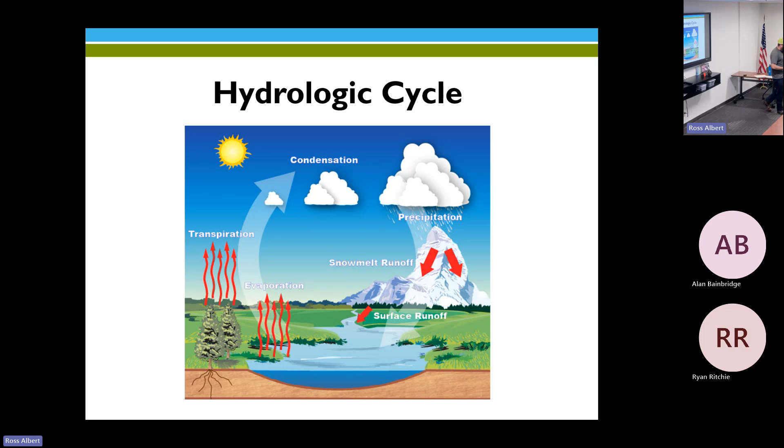What is recycled water? We're going to get a little bit into that, but we're going to step back first. All water technically is recycled. We have this natural process known as the hydrologic cycle. Even this morning, it's not fully raining. We got some rain on Saturday, which was nice. But we have precipitation that runs off either in snowmelt or, around here, surface water runoff. That again will get evaporated or transpired through plants. It'll condense again and just keep repeating. With recycled water, we've kind of mimicked this process with a couple other more human controls.

So recycled water is the product of wastewater. In Scotts Valley, we have 65 plus miles of pipeline, and that distance from the faucet to the sink is not 65 miles long, but that's the difference between potable water and wastewater. Anything that goes down the sink, any drain or anything, all ends up at the City of Scotts Valley wastewater plant. That wastewater is then treated to local, state, and federal standards. Around here, we discharge our treated wastewater down to the City of Santa Cruz. They clean it up a little bit more, and then they discharge it to the ocean.

There's a couple other projects that are recycling that wastewater, and we'll get into those later. So again, we have grit removal, we have aeration, we have sedimentation, we have chlorination. And that really starts the process off.

There's a couple definitions that I could get into that aren't really going to be beneficial for the site supervisor training. If you're interested in wastewater treatment, the wastewater plant down here and the city of Santa Cruz both offer tours. I find them interesting, but not everyone might. But the idea is we have these processes that'll sit there, clean up the water, remove a lot of the settleable solids out of it.

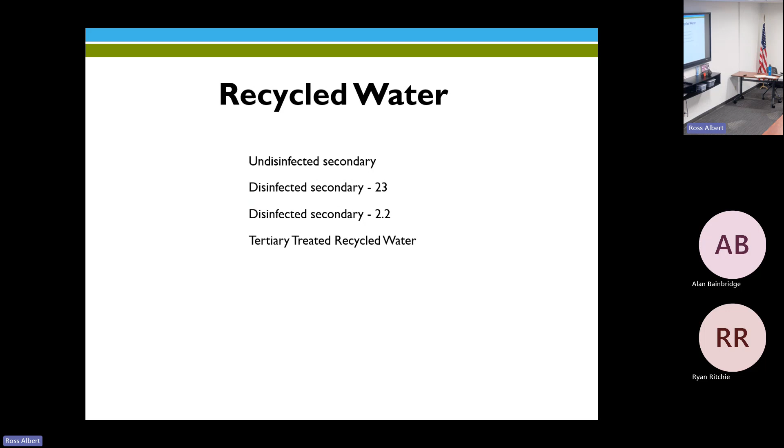Yeah, look at that. I'm figuring out how to put a red box around things. Pretty cool.

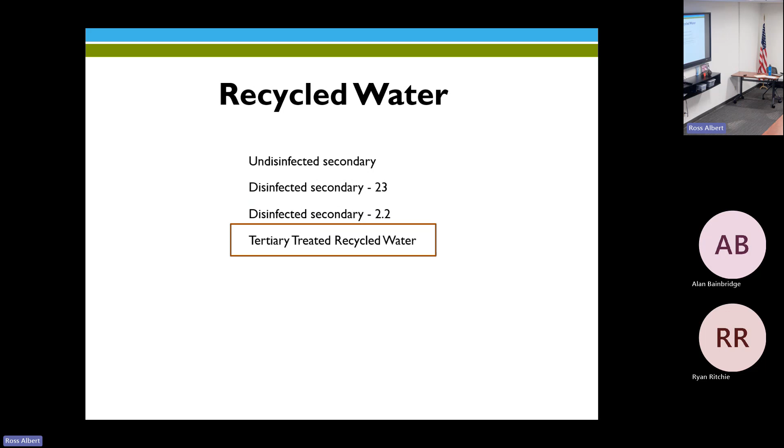Anyways, this is what we distribute as the water district and as site supervisors. This is the water that you have on site for your recycled water systems. And we're going to get into a little bit more of that. Tertiary recycled water is treated with methanol and polymer. Methanol is mainly for controlling denitrification and minimizing the amount of nitrates that are in that water.

The polymer does a couple of things. It'll change the charge of different things in the water, so they will start to adhere to each other. And by a little bit of gentle movement, it'll encourage those particles to clump. As they clump, they gain mass. By gaining mass, they get heavier and they start to fall out of suspension. So that's where that sedimentation comes in. So we have water moving through a process, and we'll do a flyover tour of the wastewater plant in a little bit, so this will make a little bit more sense.

Filtration, again, similar to that Brita filter that's sitting over there. You guys saw me fill it up this morning. Water ran through media, and with this one specifically, that just pulls out chlorine and a couple other things. UV light's a really cool technology. There's water bottles now that have a lid that you can turn on the UV light. The UV light just scrambles the structure of anything. So as a way to disinfect or sterilize something, UV light's been incredibly effective. And I'll point out the UV light when we get there.

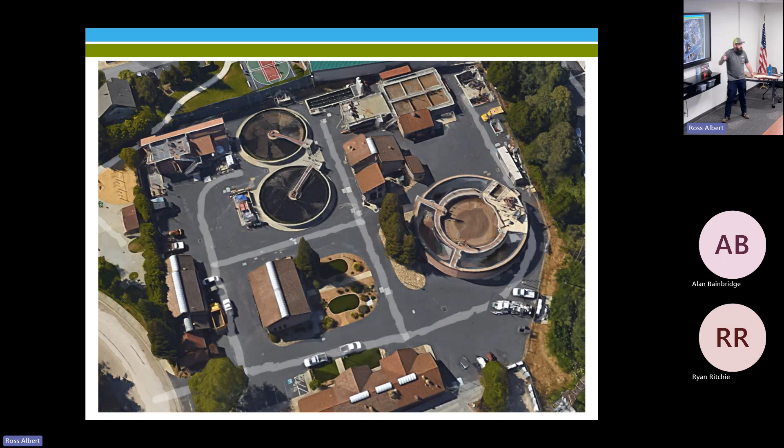There's this galley of lights that hang through, and water slowly will move through. And those lights are all those UV lights that'll scramble any microorganism that's in that water. From there, it'll come up, it'll stack up in there, and then it gets boosted out into our recycled water distribution system. With that, we've got about 14 miles of purple pipe throughout the system. And when we take an overview of Scotts Valley, we'll get into that a bit more.

Tertiary treated water, that is high quality water that's not approved for drinking. So at all of your guys' sites, you'll have one of those recycled water do not drink signs. But it is approved for landscape irrigation, crop irrigation, dust control, soil compaction, and decorative ponds. In Scotts Valley, largely we're doing landscape irrigation.

And then for construction purposes, we have a mini bulk program where people can fill up water tenders, use that for dust control, soil compaction, and then we have 1 pond in Scotts Valley. That tertiary treatment, as we ran through the treatment train for the city of Scotts Valley, removes 90% of the impurities from sewage, and it approaches drinking water quality, but it's not safe to drink. So it's still not potable, and it's not suitable for drinking, washing your hands or face, or food preparation.

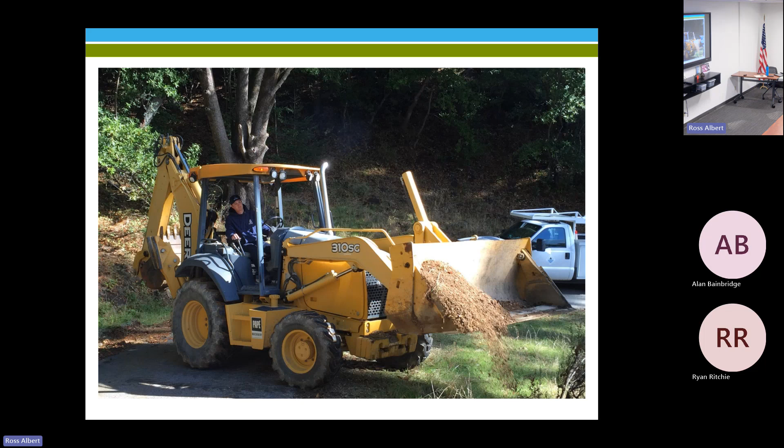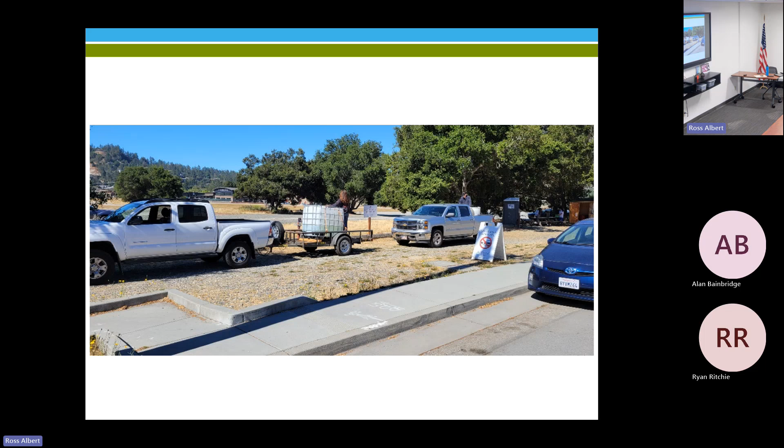Here's the fill station. This is right by the library and the Scotts Valley Senior Center. We have 1, 2, 3 places for people to fill up. So you can see people have brought in large totes, smaller barrels. We've seen people out there with like 1 gallon jugs. So yeah, that was a program. It was free water to try and provide some sort of drought assistance to the ratepayers and citizens of Scotts Valley.

Speaking of Scotts Valley, they are the ones that own and operate the wastewater reclamation facility. And then you remember when we got past that filtration, there's that little section where they started the water recycling for the tertiary grade. They've been producing recycled water since 2002. The plant has been there forever. And again, they're regulated by local agencies, regional agencies, federal agencies, state agencies. There's a lot of regulation in wastewater. They do have an excellent facility down there. If you guys are ever bored and interested, they do a pretty cool tour.

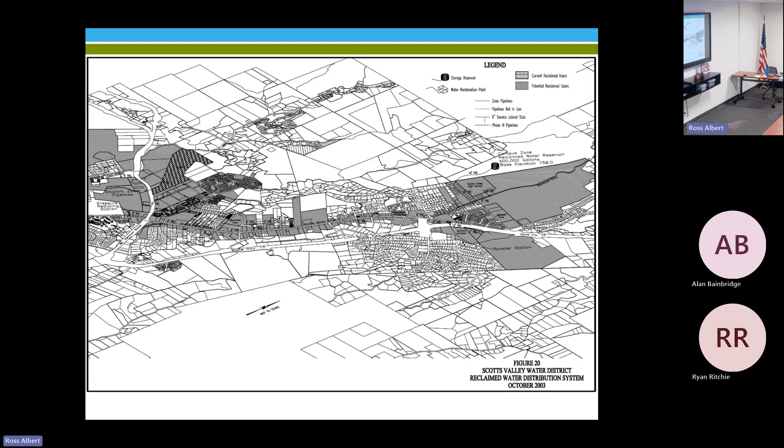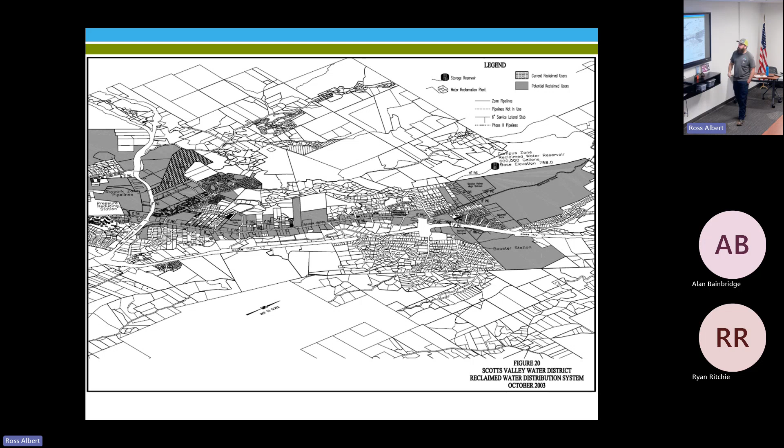So we've talked about our state regulator, we've talked about the water district, we've talked about the city, the producer of recycled water, and then now it's our customers. All of our customers should be responsible for it. But as a site supervisor, you guys are the fall guys. So if something goes wrong, you're the people that I'm going to call. So you're responsible for the safe and permitted use of recycled water at your site, and for the operation and maintenance of the on-site recycled water system.

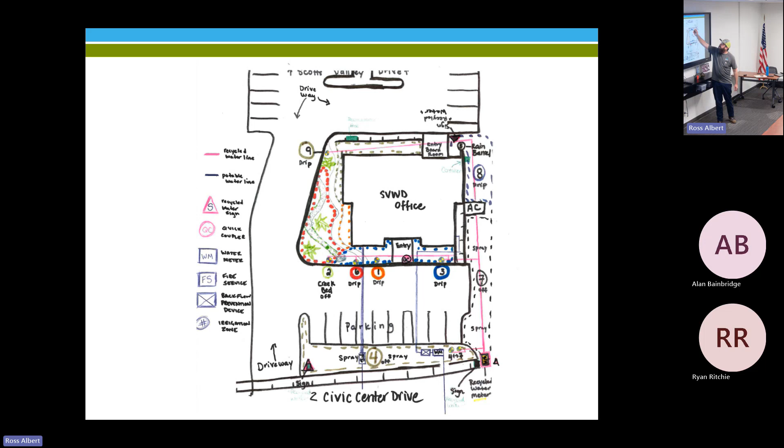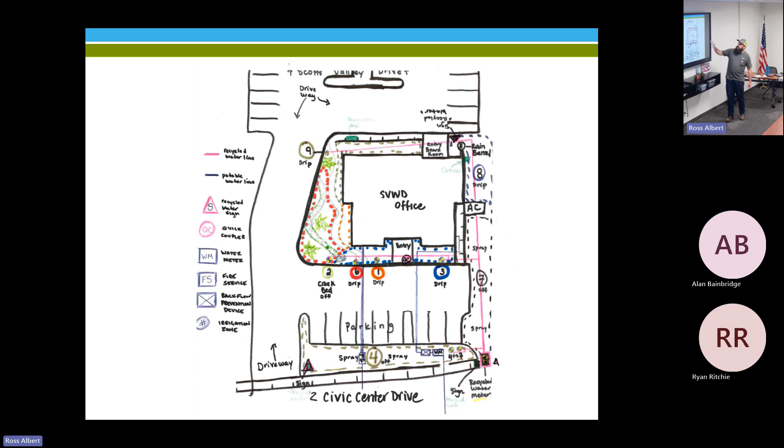Recycled water hose. So hose bibs aren't allowed on recycled water use sites, but you can have a quick connect, which wasn't on the original plan. So we've got a hose that's back out there. It's got a recycled water tag on it, so you know not to use it on potable water. And then you can put it into the quick connect and you're off to the races. So this is a little bit better. We added in Scotts Valley Drive. I don't know if that was in the last one or not. So again, more information is better than not.

Let's change the orientation of this one. This is the original as-built for the building. So again, in later years, I came out, I didn't put my fancy legend on there, which I should have. I wrote in, there's bathrooms on the second floor.

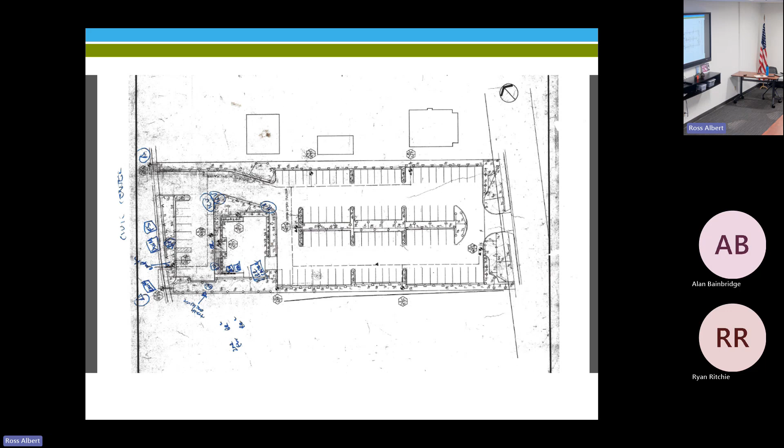So again, site map. These are two separate sites, but it's got information for the neighboring property too. So if there was a leak somewhere around, say right here, we can still find out, hey, it's actually on this system. We need to shut this meter off, not this meter. So again, maps come in many shapes and sizes. The most important thing about a recycled water use map is we want to be able to use that as a tool to quickly identify the solution if we have any potential issues.

I like this map. It's fancy. It was done in a CAD program. This is MacDorsa Park, just across the street. You can see where the potable lines run. They've identified areas. They've got where their quick connects are. They've got their valve boxes and where those lines run. They've got a drinking fountain marked out. They've got where their signs are supposed to be. You know what I don't like about this map? None of that's accurate.

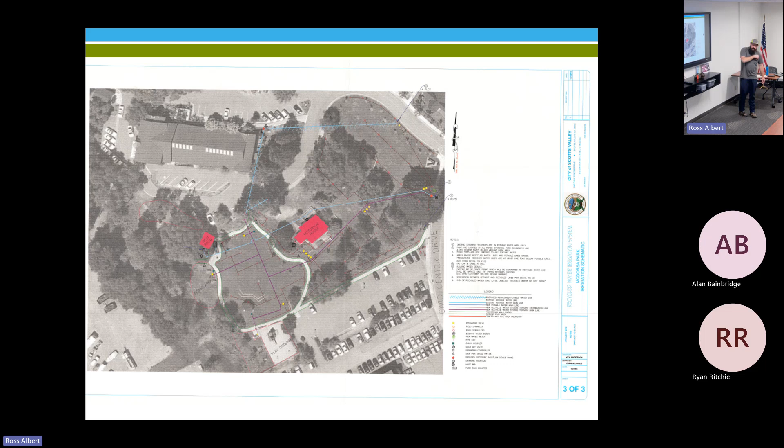There's one valve here, there's two valves here, that's still there, that's still there. These are here. But yeah, these lines. So the city's been in the process of rebuilding that system. And what they're doing is they've created a new map. They're going to run through it. And then when they're done with their renovation, Brody and I will go out there and perform another cross connection test to verify the accuracy and make sure that there's absolutely no connection between their potable and their recycled water systems. So another thing about having information on a map is making sure that information is correct.

Every recycled water use site has a backflow prevention device on their potable line. So again, this device is to ensure that water only travels one way through this pipe. So at the water meter, we're going to have a backflow prevention device. These have to get tested annually. We've got a whole section on backflow. Just wait, we'll get there. But yeah, preventing cross connections.

Also, all of our water meters, we can now tell what direction that water is flowing. So if we notice that there's any backflow on a potable meter at a recycled water use site, Brody's got alarms set up, so it'll notify him. We'll immediately go out and check out the situation. That's never happened. I don't anticipate that happening, but it is a tool that we have in our toolbox to, again, stay on top of it, prevent the cross connection between a potable and a recycled water system.

Human storm drain creek contact. We talked about that earlier. These are points that I just really want to drive home. Again, don't drink the water. Don't drink recycled water. Water use efficiency: don't have ponding, don't have runoff, don't have overspray. Ponding can be an issue with recycled water. There's a chance for mosquito breeding, a bunch of other stuff, and county vector control comes in, something that we can avoid.

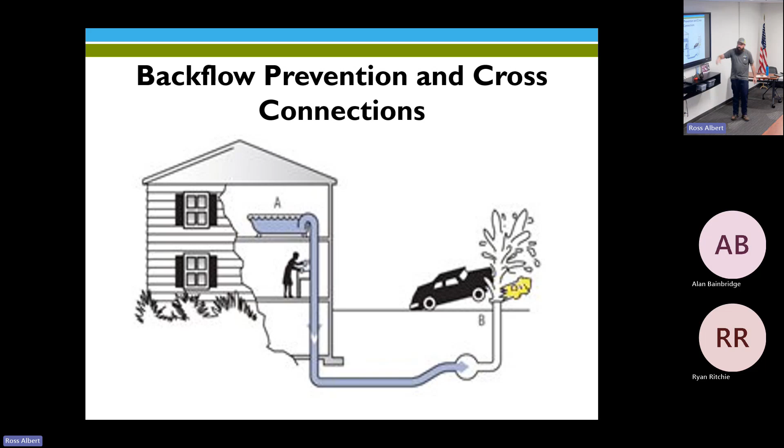So this is a good example of back siphonage. So let's say we're sitting here watching me do a really good job at a presentation, and then we hear screeching and a car hits a hydrant down Scotts Valley Drive. If we don't have a backflow prevention device, all this water is going to get sucked out of here and blow out into the street. So that's a good example of back siphonage.

And so there are direct and indirect cross connections, and a direct cross connection would be subject to both back pressure and back siphonage. So backflow prevention devices, we just took a look at that nice RP device. How could we prevent this? Put a little backflow device there. You see what I did? Pretty snazzy with the tools I'm given.

So again, we have these two independently acting check valves, and then we've got a relief port. So if, for example, one or both of these valves fail, this relief port is still set up to dump. So all that water can come through here. So in this situation, it's not bad, but what if that is not a bathtub full of potable water? What if that's a hose that's been submerged in a bunch of pesticide? So then in a backflow situation, that pesticide can be pulled back into the water main.

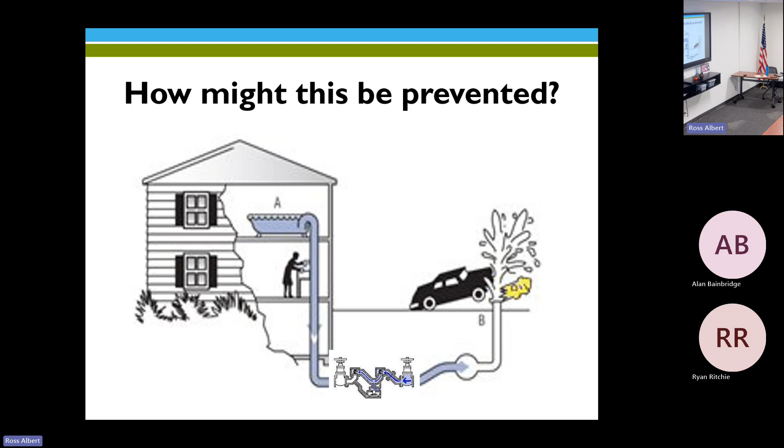And even if it doesn't come out here, it still could be in that water main and contaminate our public water supply. So the idea is a pretty simple device can go a long way, and we'll cover some case studies later about just some really avoidable mistakes.

Again, same device as you saw, but there's a picture of it. Again, you guys have these on your sites. Oftentimes, there'll be a drip out of this vent. Usually means it's working just fine. If it's something that keeps going on, give us a call. Brody and I are both certified to test and repair these devices. So yeah, usually you can just reestablish the zone of pressure across the device, but sometimes it requires a little bit more work.

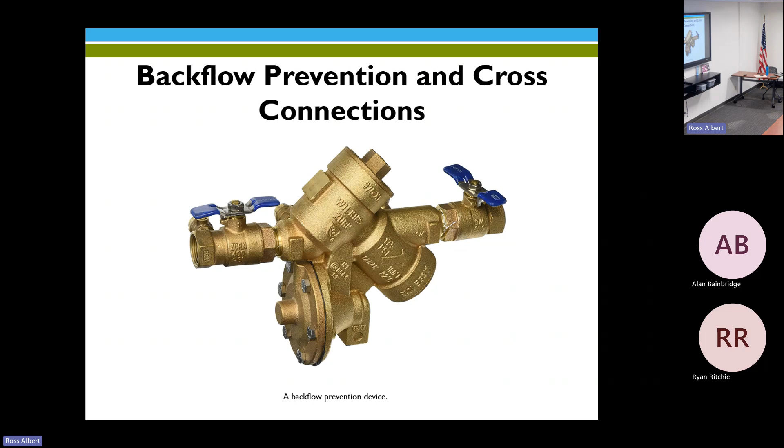You can kind of see it on this one, but there's a gasket right here. And sometimes these will tear, or over periods of time, as they fluctuate, they'll start to kind of like jellyfish and lose some of the integrity. And so that could lead to a drip. So yeah, if you see one of those dripping, give us a call. We'll come fix it. Again, we've talked about cross connections and why we don't want to drink the water.

And then we talked about direct and indirect cross connections. I think I have a good, yeah. So yeah, that direct cross connection we talked about earlier, subject to both back siphonage and back pressure. Indirect cross connection is just back siphonage, which again would be someone hitting a hydrant out on that street.

Oh, yes, famous incidents of cross connection. Does anyone have any questions? I'm sorry, I'm rushing through this. You go. So if this guy's dripping, I do see that on job sites a lot where it'll drip, but then stop. Yeah. So if it drips and stops, don't worry about it, but if it just keeps... If it's constantly dumping, yeah.

Okay. So the big thing with this is it's a reduced pressure principle. So there's about 8 to 10 PSI lost through this. When water is not flowing, these valves will close. Again, in the test that you do, you measure exactly what level they're going to close at and with how much tensile force. And then the relief port, you also check when this opens. So usually with like a 2 or 3 PSI fluctuation, that's where you can see some dripping out of it.

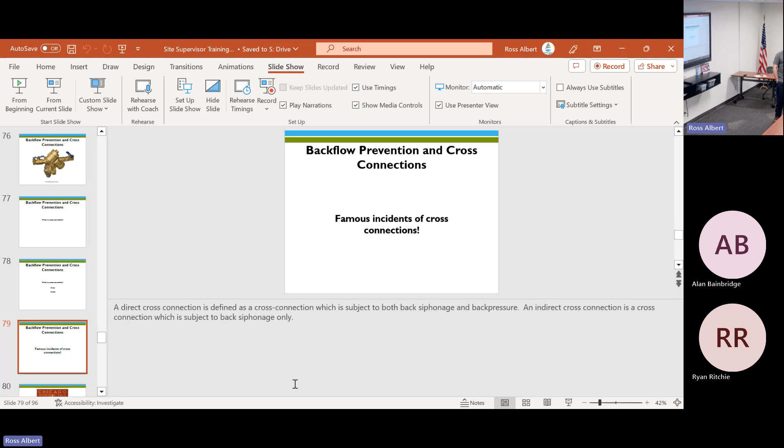Exactly. So blue, I think, is 2,000 gallons a minute and more. Green is, I think, 1,000 to 2,000. Orange is 500 to 1,000, and red is really not a lot of flow or pressure. A great thing to throw out at parties if you really want to impress someone is the color for hydrants. Watch, there'll be a firefighter there and he'll be like, I already knew that.

Are you guys all familiar with Water Smart? We have a program that's free for customers to sign up, but essentially it allows...

Tell you what, I will. Oh, the online will shows you the flow? Yeah, those things are great because you can set up alerts. You can check use history. When they call and say we have a leak, I think you'll be able to do... Exactly, yeah.

Thomas and I were chasing down that one leak. We had all hands on deck, being like, it shouldn't be this difficult. Like, where is it? I pulled up WaterSmart and both houses had leaks too. So it's gotta be on them. And then of course they go and they fix the leak, and the water's still coming. Two times your normal use. Yeah, it was a perfect storm. Broken sprinkler.

It's a great tool. You can mess around with this. Like, hey, water use has been really high or really low in this area, because we have different pressure zones around the system. So we see usage out of tanks, like, hey, maybe this tank's not communicating because it's been flatlined for a long time. For residents, there's no one using water. Yeah, I get those emails. I get them like, after COVID, is this real water usage now?

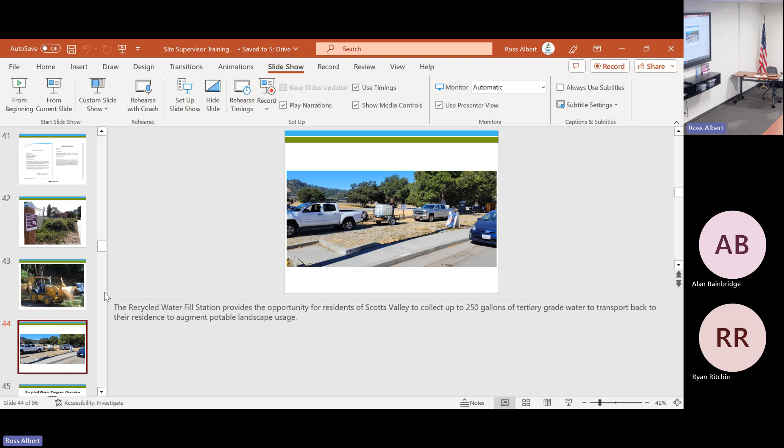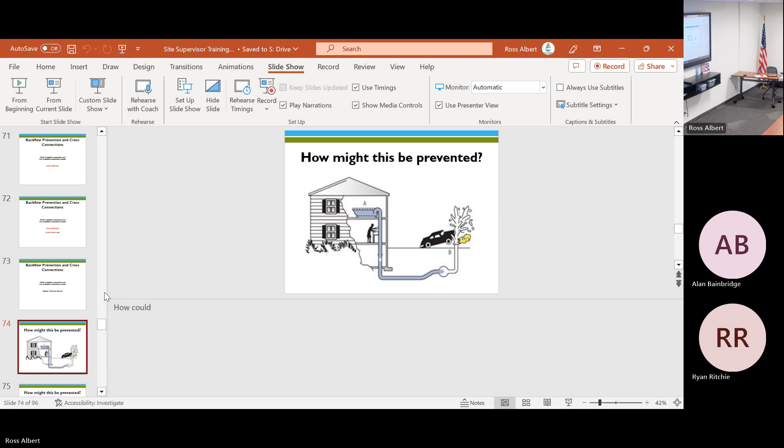We had a garbage truck back in October and it hit it. I remember one of the testers coming out there. For the building, so that's the HOA's responsibility. And people think that. Millions of dollars. That's a good HOA, right? Brutal. Well, yeah, you've got my contact. If you have any questions, feel free to shoot me. Thank you. Let me see my schedule.

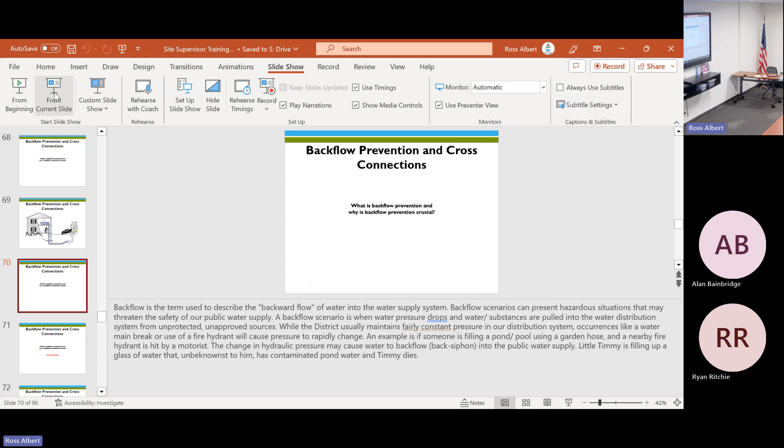But yeah, unfortunately, there is a requirement from the state for those backflow requirements. But no, that's a very good question, because in a perfect world, we never have that issue, and we will never have to worry about that issue. So yeah, that's unfortunately what it comes down to. But that's a great segue into our famous incidents in cross connection history. Are there any other questions before we jump?

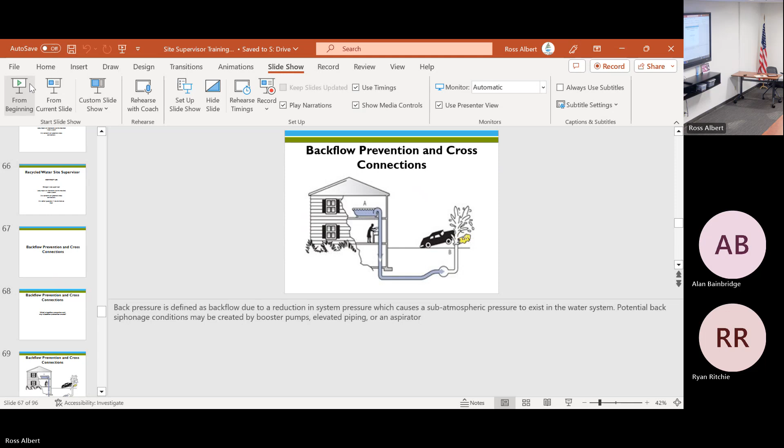Oh man, I gotta take off. I got dentist. Okay, hit the right button this time.

All right, famous incidents in cross connection history. This is a new segment that we added on this past year. I've done 4 of these trainings in person. It's the first one we're doing live and online. I've attended 14 or 15 from other water agencies since December of last year. So yeah, while it's not a fun training, trust me, I know, I've done a lot of them. But some people have started throwing in information. So as I mentioned earlier, Brody and I have done a lot of coursework related to backflow prevention and cross connection prevention.

And in those, almost always you'll hear about this, the Chicago Fair. I think I had notes for it. Yeah, there we go. So I'll read this. 1933 World's Fair. All these things that we're going to go over are incredibly avoidable. This is in American history. This is the worst cross connection history that we've been able to document and study. In 1933, there's an improperly designed plumbing system. So that caused a backflow incident.

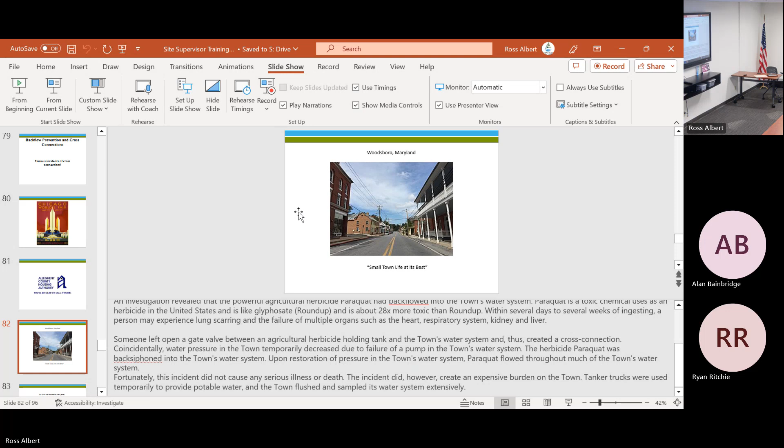Hawthorne, Fairlawn, and Hawthorne, New Jersey. June 24th, 1987. A construction crew broke a water main. It got repaired, and a customer called and said, hey, the water doesn't look right. So again, this is another avoidable thing. Pesticides had backflowed into the public water system.

So an employee at a pest control company was rinsing a tank that had heptachlor and chlordane, the same stuff that we saw in Pennsylvania. So a couple gallons of that pesticide were sucked through, and even just a couple gallons can affect a whole system. Like, I had mentioned the forever chemicals that we'll be sampling for. We sampled for them back in 2013, 2014, but our detection methods have improved.

So one small thing can contaminate a huge amount. Like MTBE, a single drop of MTBE in an Olympic-sized swimming pool will contaminate that water to the point where it's not drinkable. So with this, again, small amount, however, it did get into the system. This stuff doesn't start off too bad, but then it gets worse and worse, and eventually will lead to paralysis or death.

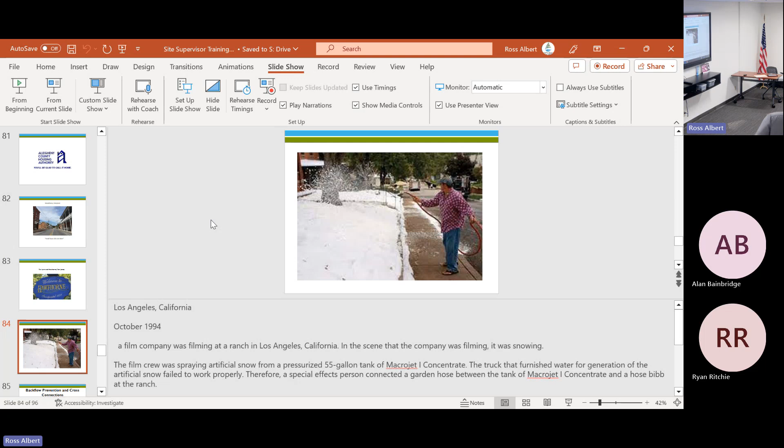So this is Nate Gillespie. He's our operations manager. Everyone. Came to check out the show. Awesome. Yeah. And we're live. We've got Alan and Ryan blocking the view.

So again, we talked about incidences of cross connections that have happened in the last 100 years. Worst case scenario, you have people that are dying, people that are getting really sick. Best case scenario, there's still people spending a lot of money, and these are avoidable things. And so that's kind of at the heart of the cross connection inspections that we do. You see how I got way more professional when the boss came in.

But the cross connection inspection, I will bug you guys probably every 3.5 years to try and get it done before that 4-year period ends. But that's different than the backflow testing, or is that? Correct. Okay. So the backflow testing is we have a certified tester that comes out. The district has a list.

Yeah. So all you have to have is a current certification from the AWWA and an approved test kit. And then they can go out. And so we'll disseminate that list with the test paperwork. But this is the annual testing requirement. And that's that $100. But yeah, if you have 20 units, it can be 2,000.

But yeah, that is the annual requirement. Every 4 years, what we're going to do is a cross-connection inspection, which is a 2-part shutdown. So at a minimum, we'll have the potable water side depressurized for 1 hour, while the recycled water side is pressurized. And we'll go through and we'll verify that we have flow on every recycled water appurtenance and that there's no flow and a depressurized event for all the potable.

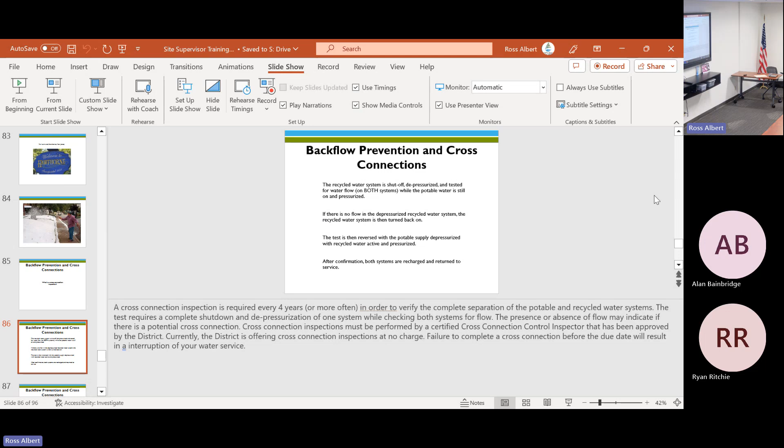So I have results of past cross-connection inspections. I have maps of everything, pictures of the site, copies of our permit, our annual site inspection reports. So I maintain this list for all of our recycled water use sites. So if you ever have a question like, hey, can I get a copy of my permit? Or, hey, I'm sending someone new out to the site, can you email me a copy of the map? Be more than happy to do that. Brody and I both have access to this. So if you want to get a hold of either one of us, having it electronically available is really nice.

So another thing that I carry in my truck all the time with me is a manila folder like this that's got the emergency cross connection plan in there. So in the event that we do have a cross connection that happens, we have very specific guidelines that we follow in order to rectify that situation. So if you ever have a concern, if there's a potential, if there's a weird gut feeling, give me a call. Brody and I are more than happy to go out there and check in on things.

But yeah, call us immediately, especially if something is happening. But if it's suspected, just give us a call. We'll have do not drink signs. We'll work with the appropriate regulatory agencies to verify that we're doing all the right things.

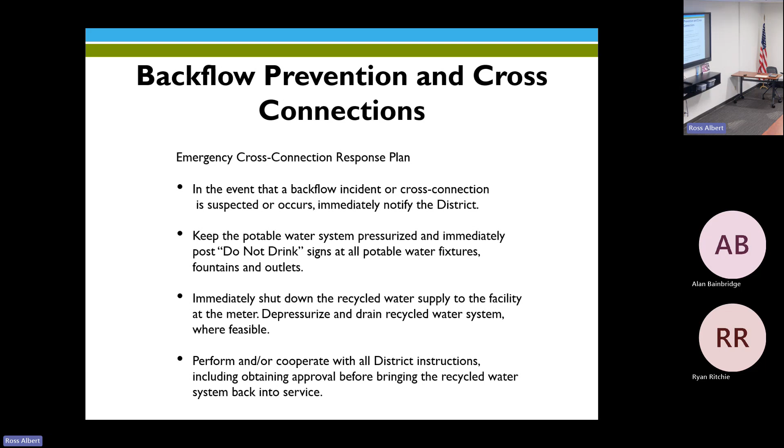Yeah, just work with us throughout the process because we'll get it fixed. Here's an example of the plan itself. So it really breaks down who we're supposed to talk with. So yeah, we've got that paperwork. It's easy to run through. Luckily, Brody and I have not had to do that yet. And those cross connection inspections and backflow preventers, that helps, and site supervisors.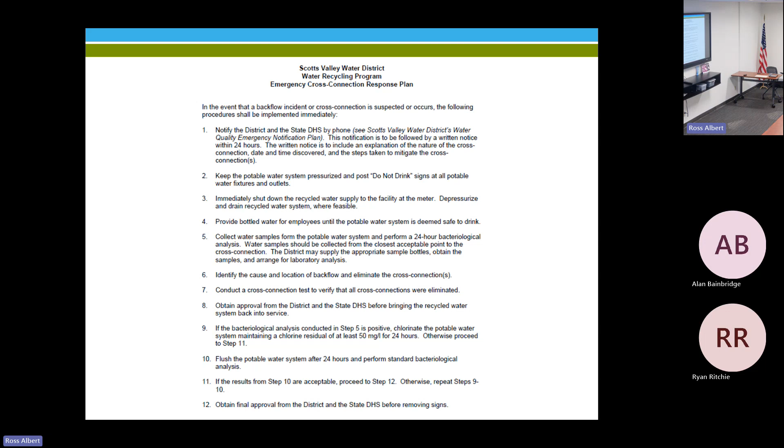So you guys, now that you're more knowledgeable about recycled water, it's easier to run through this if people are familiar with their use site and rules and regulations related to recycled water. We've got, I think, 10 minutes left, just about. I have an exam that we can run through. I like to run through this together just so everyone kind of knows, and if there's questions or things that people aren't sure of. This will be graded. This will be on your review.

Oh. Thank you. Do you guys need pens? Yeah. Really? Yep.

Now, I'm not colorblind, but I'm color deficient, and I have trouble reading the difference between red and black. But there's kind of a theme in this, and if you guys pick it up, this is a good thing that you guys can hold on to, and just use as a refresher if you want. So we'll do a little crowd work here.

So number one, which of the following are permitted uses for recycled water? A, drinking, B, washing your hands and face, C, cooking, or D, none of the above? D. Yep, terrific. Number two, recycled water is the same as potable water. True or false? Exactly, that's false. Three, there shall be no physical connection by either piping or hose bibs between the potable water supply and the recycled water distribution system. True. Yep. Again, if you're following along at home, you can see that the red answers are usually the correct ones. But I do need to double check myself.